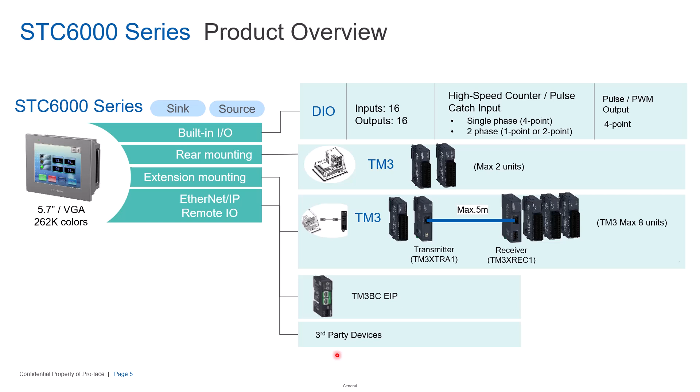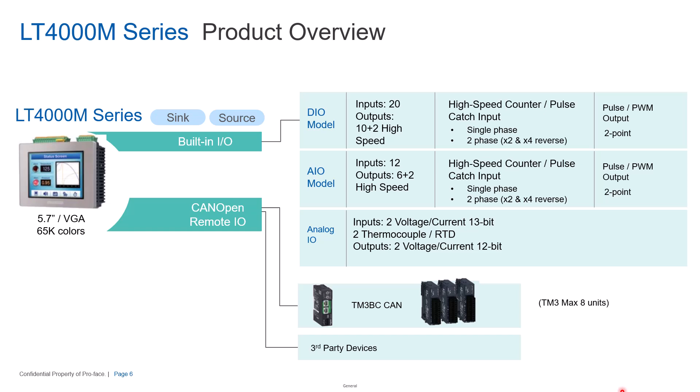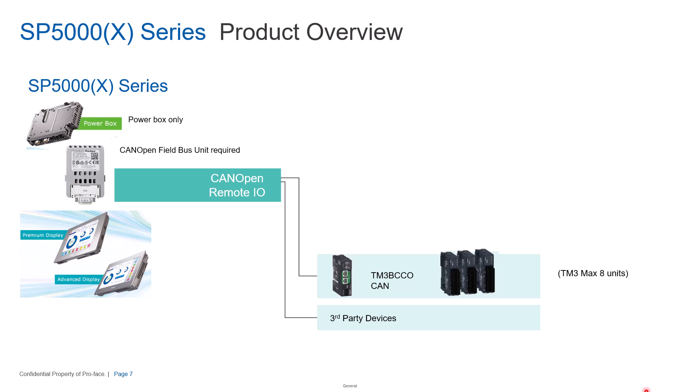And then again, we can do Schneider Electric TM3 BCCO CANopen bus coupler module and also communicate to other third-party CANopen devices. Okay, so let's get into the software and see how we actually do this in GP Pro EX.

All right, so here we are in our GP Pro EX programming environment. And you can see, if you take a look way down here in the lower right corner, that I've selected an STC 6300 for my display unit, which is the STC controller. So now where you drive the logic from, so you can see here when it basically starts, depending on your environment, depending on your settings, etc.

Maybe this could vary, but you can see here I basically have a screen open, and then I have my project window. Okay, so where I want to actually be to talk about the logic is the screen list. And what you'll notice right away is the screen list includes not only the graphical screens that are part of the HMI project, but there are also these things we're calling logic screens. And you can see by default it creates an initial logic program, which is a program that will run once when the unit boots.

And then, by default, you have a main program which will run continuously when the logic program is running. Then additionally, you have the ability to add new screens. Effectively, when we're adding new logic screens, what we're doing is adding new subroutines which you can call from the main program.

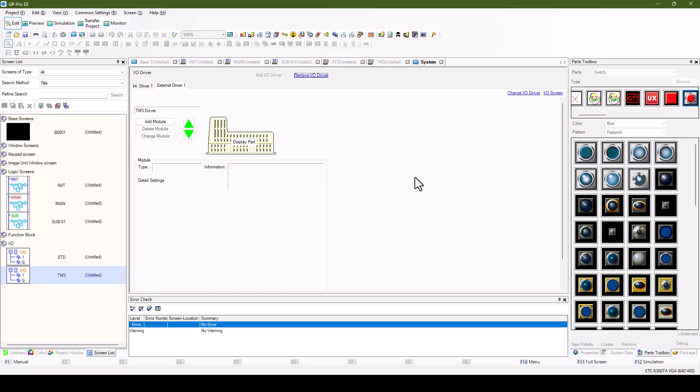Okay, and this is the standard built-in I/O. This is where we take care of the TM3 I/O right here, and then you can see you can add modules, etc. Again, not going to get too far into it, but just wanted to show the basics. Okay, so let's go take a look at what it looks like to actually program the ladder logic in the EX environment. So I'm going to go back to my main logic program here.

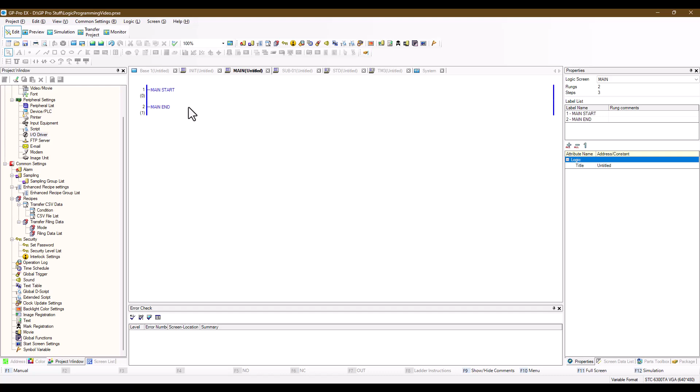Okay, and now one of the things that you'll notice is when you go into the main logic program, you will see that there is a toolbar here for actually programming in ladder. So you've got the different toolbar commands related to ladder logic programming. It has insert, insert instruction, etc. Alternatively, you can just come directly here into the ladder editor, and for example, you can go ahead and insert a rung.

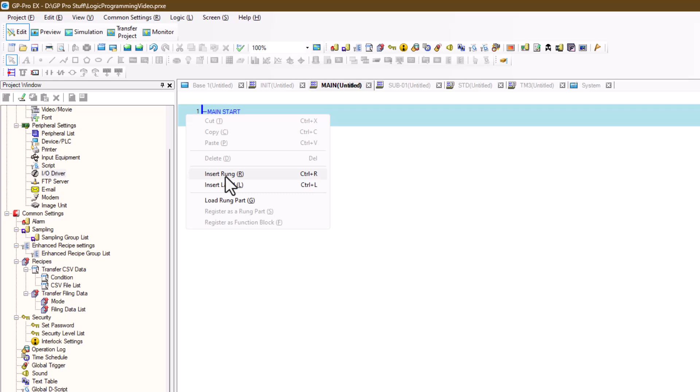Okay, and then once you've inserted a rung, I'm going to go ahead and insert an instruction. Again, this is all using right click and then browsing the instruction field here. I'm just going to pick a basic instruction like this. Okay, and then what you'll notice is as I am typing in these variable names tied to these instructions, it's allowing me to directly declare those variables for my EX program. So I'm going to go ahead and do that.

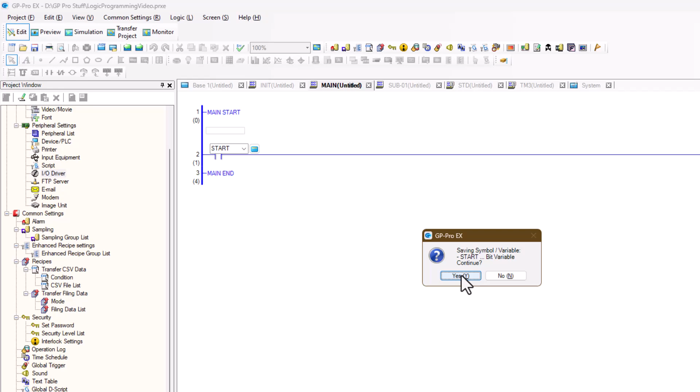I'm going to go ahead and insert a stop. Okay, again, declaring the variable. Let's go ahead and put our output in.

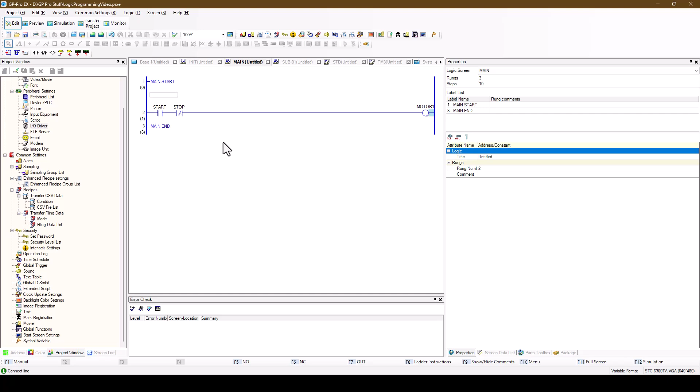It's going to be motor 1, and also declare that. Okay, so now I've created just a real basic ladder rung. Okay, so now one thing that I'd like to show you also that's interesting is that doing a branch in GP Pro is quite simple.

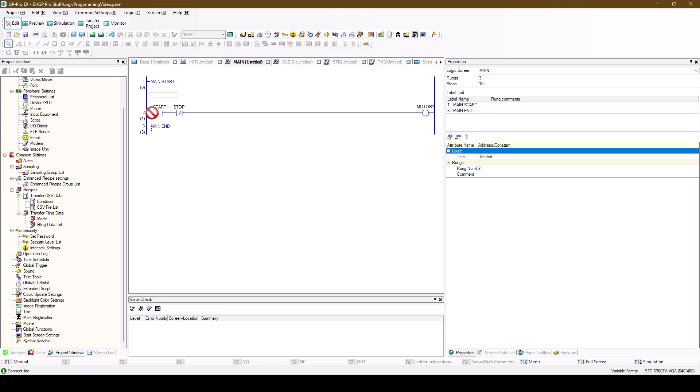Let's say I'm creating a start-stop circuit. What I want to do is create a latch around my start, because my start is going to be a momentary. So I'm just going to drag. I can click on the rung to the left of the instruction and then simply drag and drop around the rung, let go, and now I've got my branch.

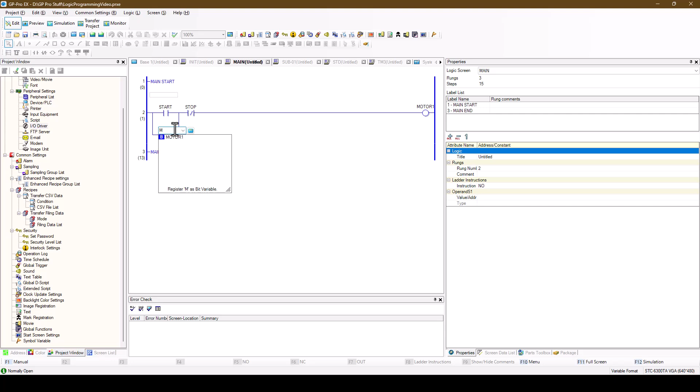Now I can simply right click on that again, enter my basic instruction, and then instead of typing, if I just type in the leading letter of the variable, it should pick it up, and I can place in motor 1. Okay.

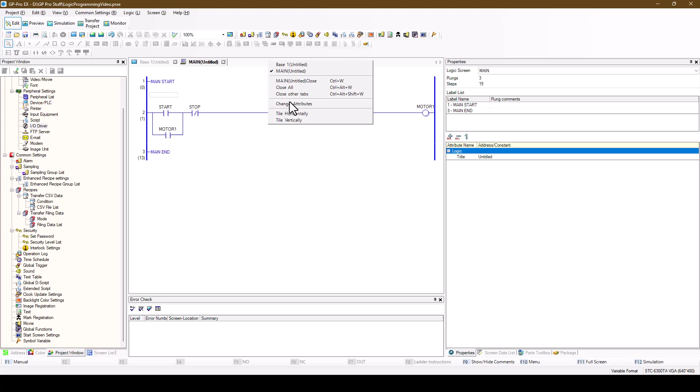One other thing that I'll show you here: let me go ahead and close all these tabs except for my main logic program and my base screen. Then I can right click in here and say tile, and I'm going to tile vertically so I can put them side by side. Let me move this over here a little bit.

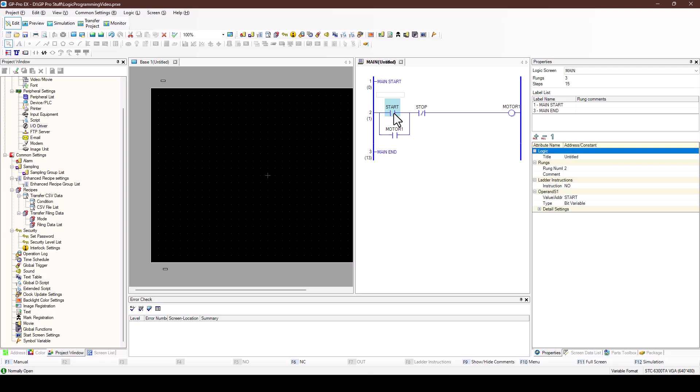Within GP Pro, you have the ability to drag and drop the variable and the instruction into the HMI screen, and you'll see what it does. So I'm going to drag this over. When I let go of my drag, because it's a bit instruction, it's inferring that I'm going to do a bit switch.

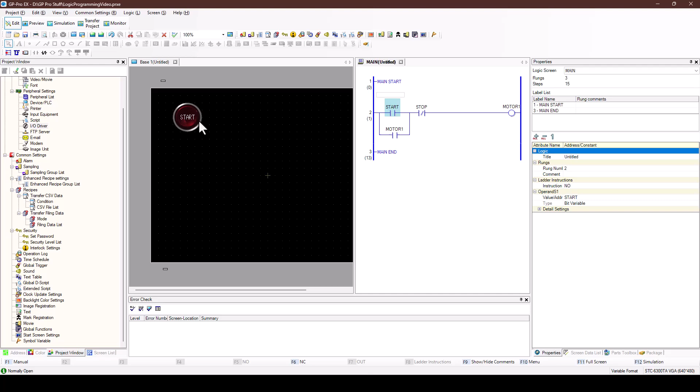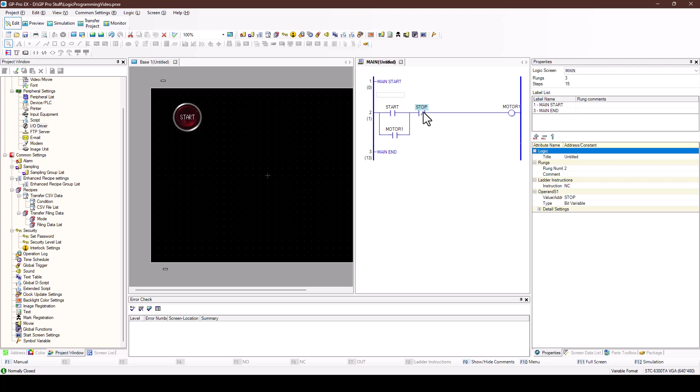You can see it placed a bit switch by default and made the label start. When I go into this bit switch, you can see that it already applied the variable name to that switch and put the variable name in the label attribute. And we'll of course use this as a momentary button. Then we can do the same thing for our stop; you have to grab it in the right place.

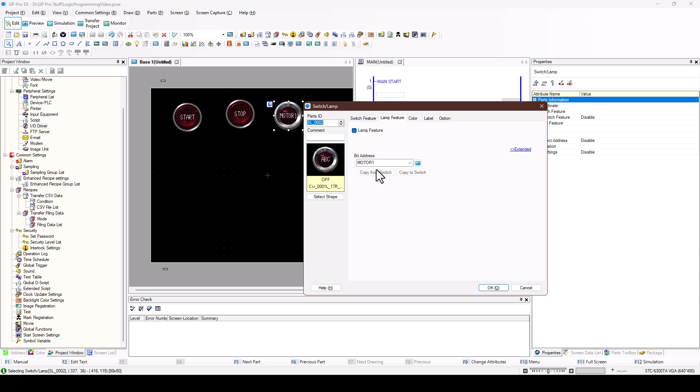And now when I do it for this particular one, because this is an output, it will want to create a lamp object. But you can see it does the same thing. It pre-populates it with the correct variable name in label.

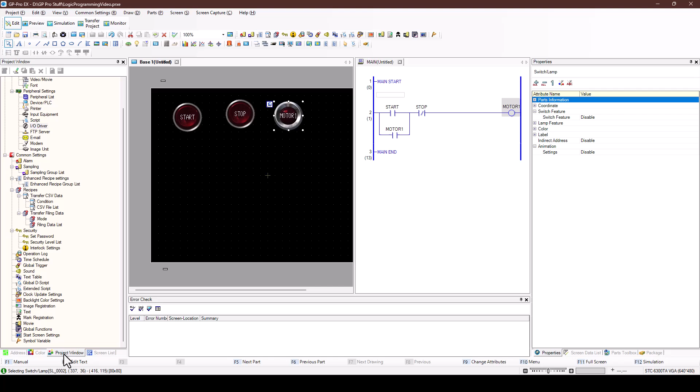Okay, so one last thing that I wanted to show: you notice that on the fly I've been creating these variables, right? Remember back when I declared the input variable; basically I'm declaring variables as I program the ladder logic. So where do those variables actually exist? If you go back to the project window and go to the symbol variable list, that's where you will see them.

When you declare them in other sections of GP Pro, they are automatically put into this symbol variable list for you. And you can also, of course, come in here and declare other variables as needed. I'll go ahead and change that to a bit variable also. Okay. So that was what I was going to show you in GP Pro EX today surrounding ladder logic.

Please note that this is the first in a series where we will be taking a refreshing and new look into some newer and some very important functions in GP Pro EX that we haven't looked at in a long time. So look for future content around that.